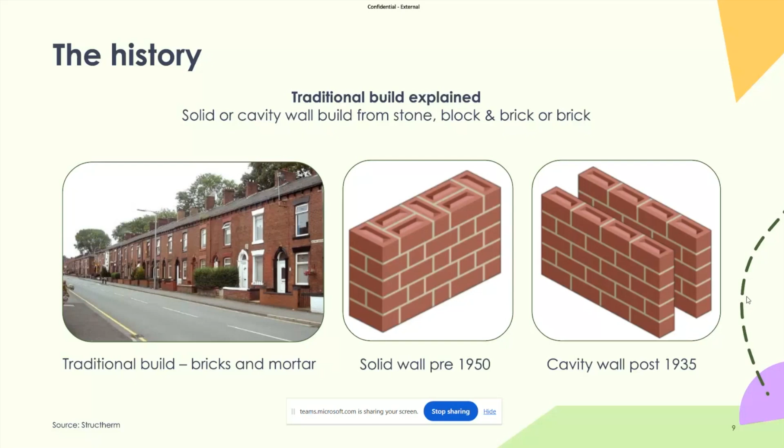In terms of solid walls, obviously pre-1950 is pretty much solid wall construction. Cavity walls started coming into construction around 1935, but as things have changed over the years, it's a multitude of different sorts of cavity walls that you'll find now. You'll find block and brick, some will be brick and brick, all sorts of multitudes. And the way things have moved on, a lot of more modern buildings will be a mixture of timber frame as well as a brick skin on the outside.

So the history with non-traditional buildings - obviously after World War II, there was a bit of a change in the construction sector. There was a shortage of brick manufacturers as well as actual skilled labour and brick layers to put the houses up. So as the war effort looked to diversify away from the factories that were supporting the war, a lot of them then got involved in building houses.

So stuff like the BISF, which was the British Iron and Steel Federation - they designed the BISF house, which was done in a few different archetypes. But generally, it was a need to construct buildings quickly, and they didn't always think of the long-term solution. So some of them only had a design life of 30 years.

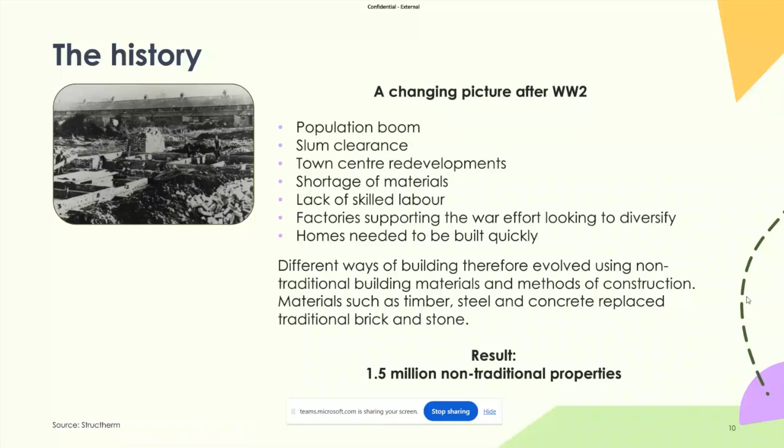A couple of examples of the different types of non-trads that you'll come across, particularly in terms of housing associations and council stock. A lot of these properties were built by councils and housing associations, so a lot of them remain within their housing stock. They are some of the harder properties to deal with, and the main issue is the structural condition.

BISF properties are one of the ones that fall into the steel frame category. You've got Boswells, Aireys again, they fall into the PRC category, so they're a concrete frame structure with concrete panels on the outside. The cross walls are a bit of a later addition, so they're classed as RATTRADs, or rational traditional construction.

RATTRADs are a little bit later than non-traditional construction. The idea was you would build traditional construction masonry walls as your gable end and party walls, and then have timber factory-made panel constructions shipped in, transported on site, and dropped in on the front and rears. In many cases they're non-load bearing on the front and rear - just infill panels.

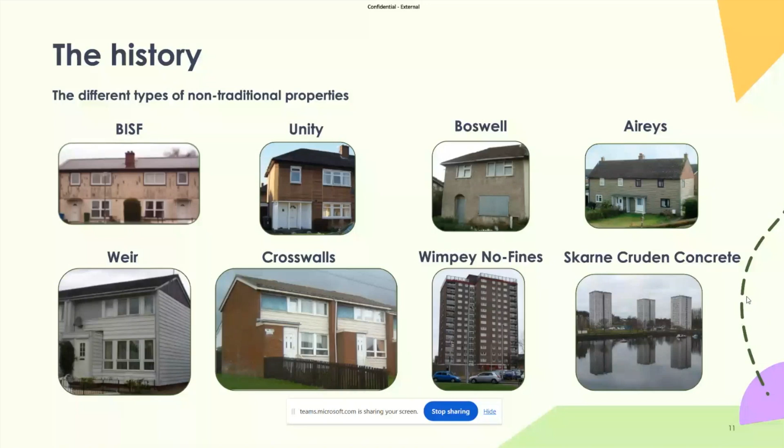The four types of non-trads by category are: timber frame, precast concrete, metal frame, and in situ concrete. For timber frame properties, there's over 142 of these specified by the BRE, and in terms of identifying timber frame properties, it can be a little bit more difficult.

The main reason for that is they're externally clad with a multitude of different finishes, and when they were originally constructed, you may find they've gone through refurbishment projects where the original cladding was taken off and replaced with something else. So trying to identify the type of timber frame non-trad you're dealing with can be quite difficult.

In terms of the solution for non-trads, the metal frames - for example the BISF, which the 3D graphic is showing - is the steel frame structure with sheeting rails and wrinkly tin cladding at first floor level. At ground floor, the structure differs again.

Instead of sheeting rails and wrinkly tin cladding, you've got render on chicken wire mesh that's pinned back to the steel frame. Some of these steel frames have brickwork on the outside - Trusteel is a good example. Trusteel construction is basically a steel frame with a brick skin on the outside, and dealing with them requires a different solution.

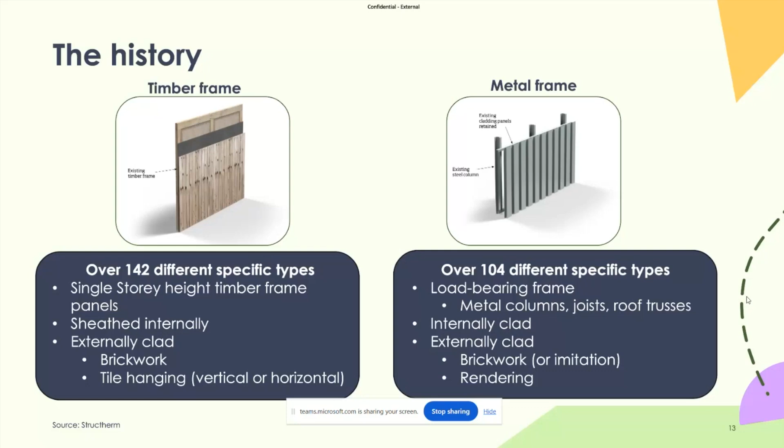External wall insulation works for solid wall properties, where the name suggests you've got a solid wall fixture. With a lot of these non-traditional properties, you'll find you've either got framed structures or, like in situ concrete, two leaves of in situ concrete typical of a cavity wall construction - with block work on your inner leaf and brickwork on the outer leaf.

With in situ concrete, your usual issue is that you'll find problems with the wall ties between the two layers of concrete. Another form of in situ concrete that's a non-traditional construction worth mentioning is no-fines construction.

No fines is a little bit better than some of the other non-traditional properties, in the sense that it tends to be around 200 to 250 mil thick of no-fines in situ concrete. The problem with no-fines is that, as the name suggests, there's no fines within the mix, so it's quite an aggregate concrete mixture.

When you put fixings in there, they tend to be pulled out by hand because they just blow in the actual concrete. We have a method of dealing with that - rather than specifying hammer fixings, you would look to specify STRU anchors. It's also very important that you do pull-out testing across the properties you'd be looking to address, because the nature of no-fines concrete means the mix of the pour is always a little bit random.

The people mixing and pouring concrete for the first couple of houses on a street during construction might use a different mix to what you find later down the street. There might have been a different group of labour working on those properties, or they might have simply got a better mix as they went through the construction phase.

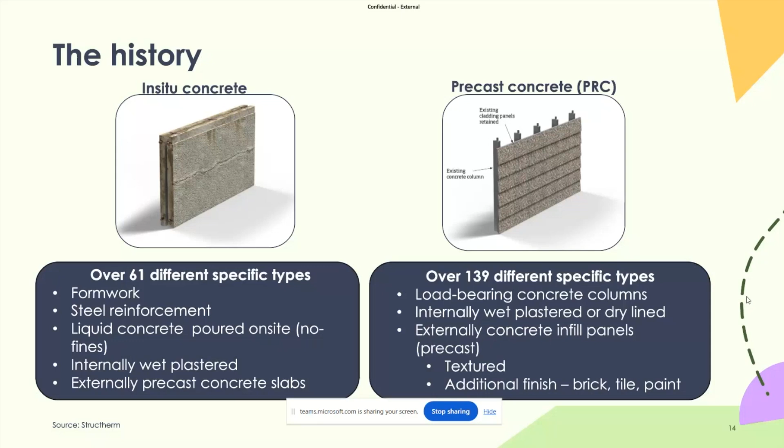So it's important for all these non-traditional properties to undertake proper structural investigations, with structural engineer involvement, ideally engineers who have experience dealing with these types of properties in the past. That's becoming more of a problem, as the age of the properties increases, the wisdom of the people dealing with these properties is also shrinking.

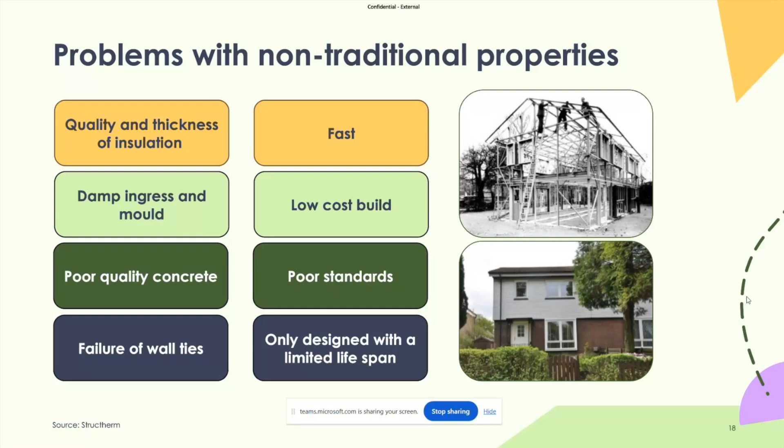Identifying non-trads - as I've mentioned with timber frame properties, the different cladding types can make it quite difficult, as well as the fact that when they were originally constructed, a lot of works might have been undertaken at that time. We've seen BISF properties that have been overclad with weatherboarding, but there's been no insulation - it was just an aesthetic upgrade.

It might also have been a way to stop water ingress if they were having problems with the existing cladding. So identifying the properties is really important for us as a starting point, as well as structural engineer involvement - if they're able to help identify properties that aren't able to be identified until you actually start poking around and making holes in these walls, and getting up into the roof space is always a good point.

Corrosion is an issue in terms of problems that can be faced, as we've mentioned with the steel frame properties, and what we've found with some of the issues of corrosion. It's a real thing that needs to be taken into account, particularly if you're going to be putting external wall insulation or even internal wall insulation on some of these structures. If they're not structurally sound, the last thing you want to be doing is applying additional weight.

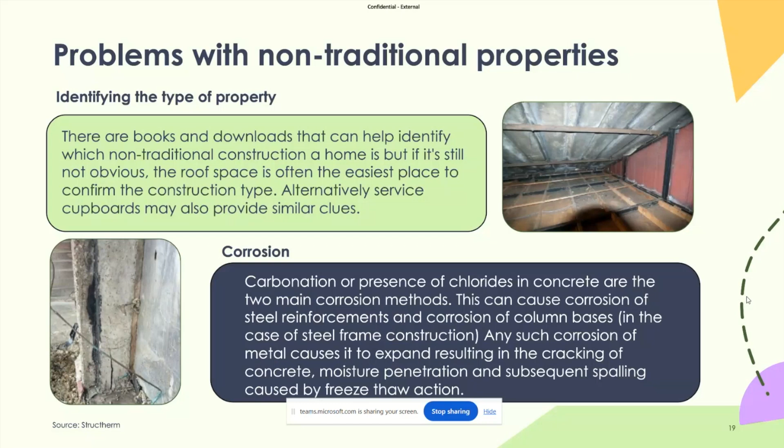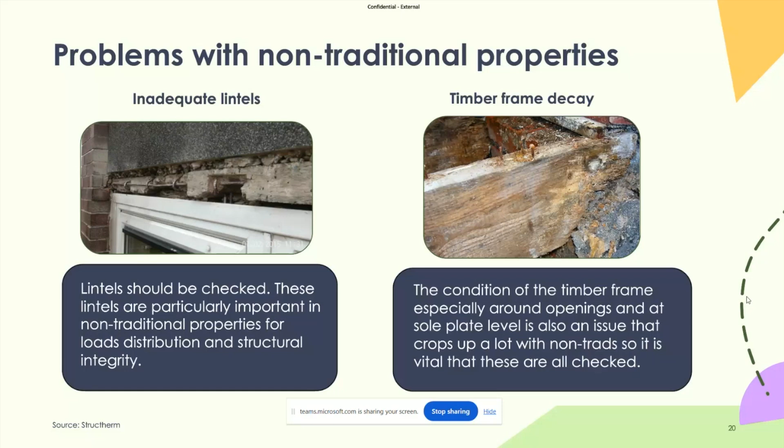As I've touched on, in terms of trying to identify non-trads, the problem with existing cladding is the wear and tear. They're aging properties - a lot of these were built in the 50s and 60s, so they're coming on to 60, 70 years old in a lot of cases.

The cladding that was always on the outside, the BISF steel sheet profile, has tended to fare quite well. We have seen it painted over the years, and it doesn't look very clever when that starts flaking, but they do the job in the sense that they keep the water out.

Concrete panels on precast tend to be the worst in terms of cladding panels for water ingress. Weatherboarding and timber boarding can have problems too, as can tile hanging - it comes with any of these cladding systems. If they've not been properly maintained, you're going to find issues with water ingress, and parts of the cladding wanting to part away from the building. We've found some precast concrete panels in such a bad structural state that the panels are basically bowing away from the walls, or stack bonded, so one has fallen onto another and is slipping out of place.

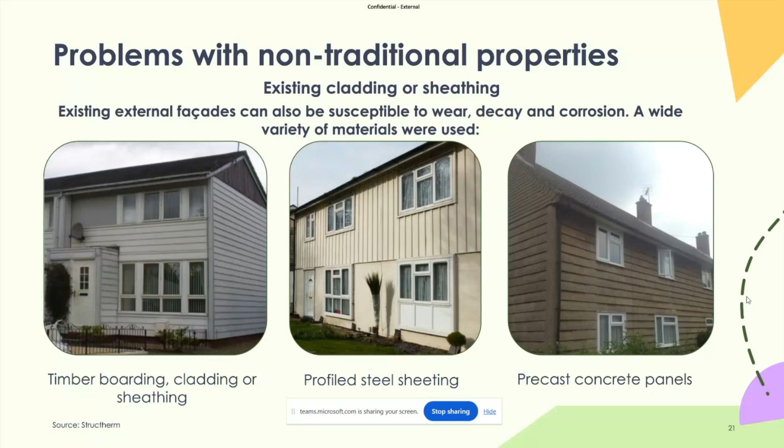So it's about identifying these properties and understanding what condition they're in before specifying solutions. As mentioned with the Airey property, that's probably the key one on this list, but this list is from the Housing Act 1985, which put the designated defective clauses together from the BRE - these are the non-traditional dwellings that the BRE identified as defective, meaning they've got structural issues.

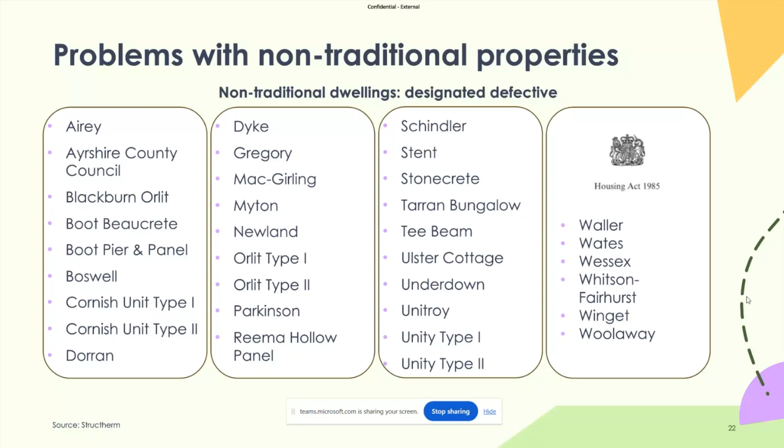So the challenge with non-traditional buildings is upgrading to current regs while minimising the risk of condensation. It goes without saying that if you're applying external wall insulation to any building, you want to minimise condensation risk and increase the thermal value. Increasing thermal value is straightforward for straightforward walls - if it's all solid brickwork with just window openings to consider, that's not too bad in terms of calculations and making sure your thermal bridging is okay.

When you're into non-trads, you're into a multitude of different wall build-ups. On the same property you might have different areas of different build-up - you might have wrinkly tin steel frame upstairs with some insulation within the frame, and downstairs solid construction with just render mesh, no insulation within the frame. So you need a starting point for deciding what to do with that existing build-up. Are you going to alter it before putting EWI on it? And if so, what's the risk of condensation or thermal bridging in areas where you're not able to get the same level of insulation?

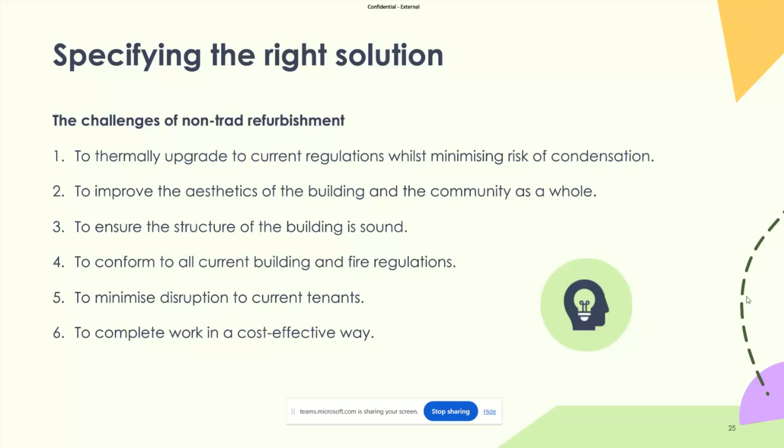So the options for insulating properties: you might be aware of IWI, internal wall insulation, and cavity wall insulation. Both offer their benefits and disadvantages. IWI's main disadvantage is the loss of living space and having to do the works inside the property. As mentioned with tenants, engagement is important, and the last thing people want is someone taking all the wallpaper off to put IWI in, then having to redecorate and disrupting kitchen and bathroom spaces.

But the upside to IWI is that it can lend itself in certain situations. If you've got rear extensions or conservatories and you're doing an EWI scheme, you might do EWI to the front, rear, and side elevations, but when it comes to the conservatory space you'd do IWI there instead, while still applying wall insulation externally to that wall. So there are details like that where you can get continuity of insulation when you've got conservatories on the rear of properties - it's just using a mixture of EWI and IWI sensibly.

Cavity wall insulation: as mentioned at the beginning, solid wall and cavity walls can both be treated with EWI. The benefit of using EWI with cavity wall insulation is it addresses some of the drawbacks of CWI. If you're living in rain exposure zones, which are quite high in Scotland, the northwest Manchester area, up on the Pennines where I am here, South Wales and the westerly Wales areas, it's a lot wetter than in the east and southeast, for example.

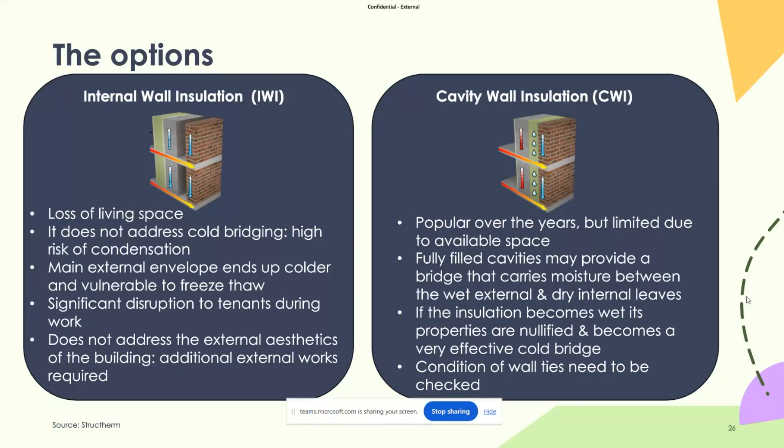The other side of that is when applying EWI to cavity wall structures that don't have insulation in them, it's important to block off the head of the cavity and any openings that could cause thermal bypass, or the risk of it occurring in the cavity - basically when cold air moves in the cavity behind the EWI system, which downgrades its effect.

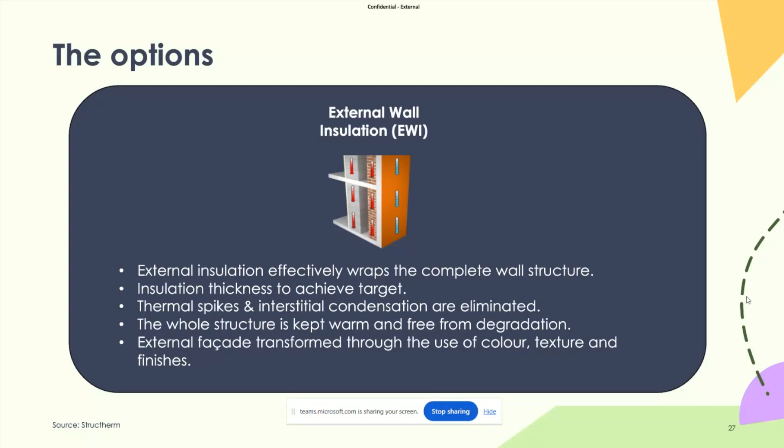So EWI, for anybody not familiar with external wall insulation, is effectively insulation layers with a render coat and base mesh. Basically you've got your insulation fixed back to your structure, then a render coat with a mesh layer which provides strength and impact resistance, and then a finish of choice. The render finishes tend to vary, and we'll touch on them a little later.

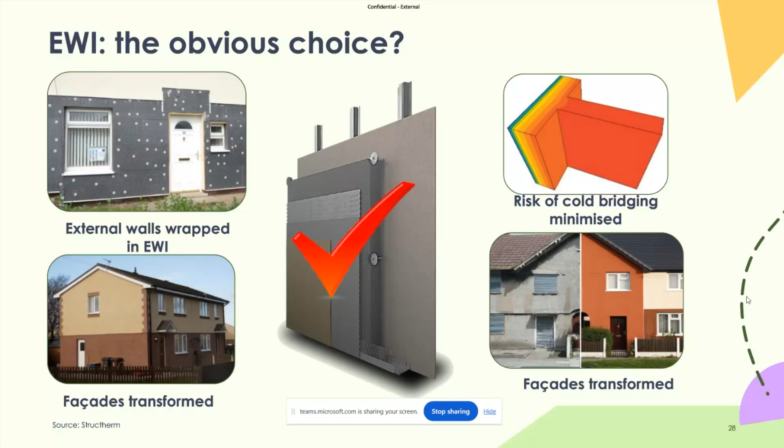So is EWI the obvious choice? As I've already touched on, I don't think so, in the sense that it's not always the go-to solution. In some cases, there's a mixture and an approach that works best depending on what the scheme is. So if you've got the luxury of being able to do a mixture of CWI and EWI and getting increased thermal value, it also means the EWI system can be slightly thinner than if you had no insulation within the cavity. So it's being able to make these choices and understand what's required for each project.

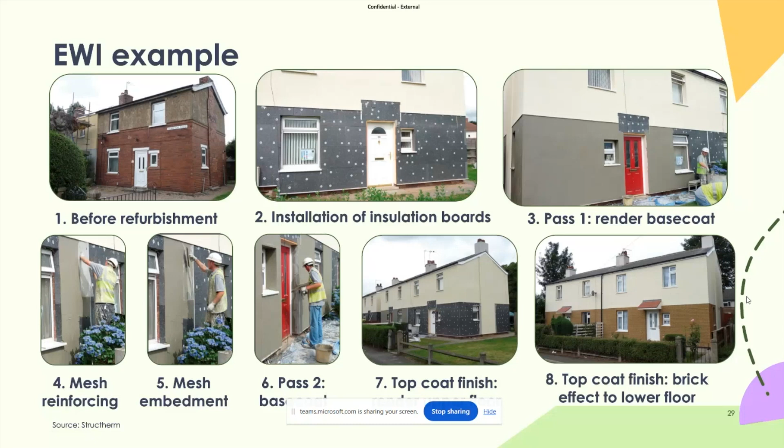So this is an example of an EWI installation process: getting the insulation boards, base coat, the mesh embedment, the base coat layer for the second layer, and then your top coat finishes. So then we're finished in the silicon and brick finish on these particular properties.

As I've already touched on with IWI and EWI, there can be instances with EWI where there needs to be additional works done to make it suitable, otherwise you're going to have issues. So as I've mentioned with the structural engineer, making sure that one is appointed and understands the structure and the loads of the building, so you don't want to be putting on additional weight if that external leaf is going to want to part away from the primary frame of the structure.

Likewise, ensuring that the actual substrate can be fixed. So solid wall properties, as I've mentioned with EWI, can become mechanically fixed as well as adhesively fixed if required. That's perfectly easy to do in the sense that you can do a fixing pull test into the brickwork, and the brickwork tends to be fairly consistent across the wall.

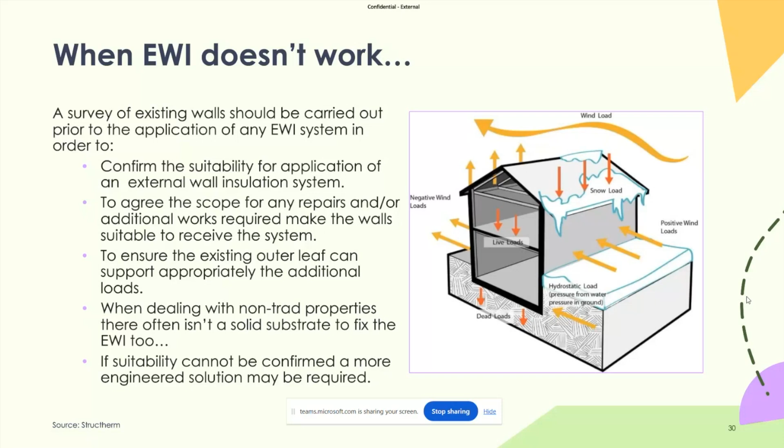When you're with non-traditional properties, you don't have a solid wall to fix to, and instead you've got a framed structure with an infill of some sort, and that infill in some instances might only be 50mm concrete panels, which are not going to provide you a wind load, a pull load, in the sense that the fixing test will just go through the concrete panel, spoil the back of the panel, and you'll be able to pull the fixing out with your hand.

So the structural EWI system differs to standard EWI in the sense that it's formed within a wire frame cage. The Warren trusses give the cage its structural rigidity and strength. The structural EWI system is used for non-traditional properties as well as high-rise properties where standard EWI isn't a viable solution. It's able to span, and it fixes differently to how a standard EWI system fixes. We've also used it for reconfiguring building facades, enclosing balconies and walkways on high-rise buildings, and forming new and extending parapets when you get to the very top lift of the high-rise.

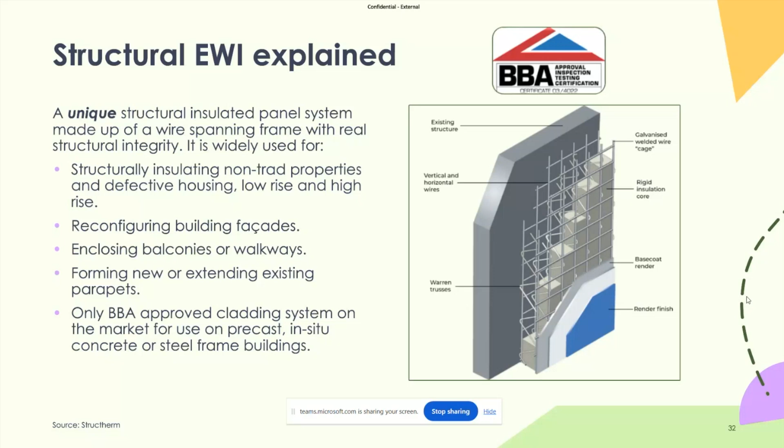As the EWI and structural EWI differ, the main thing with the existing substrate is how that is going to work. So if you think of EWI as a tea cozy, in the sense that it's wrapped around the building and keeps it warm, the structural EWI can be seen as a bit more of an EWI system that's got a tea cozy with a corset on, in the sense that it's holding the building tight and basically stiffening the structure up.

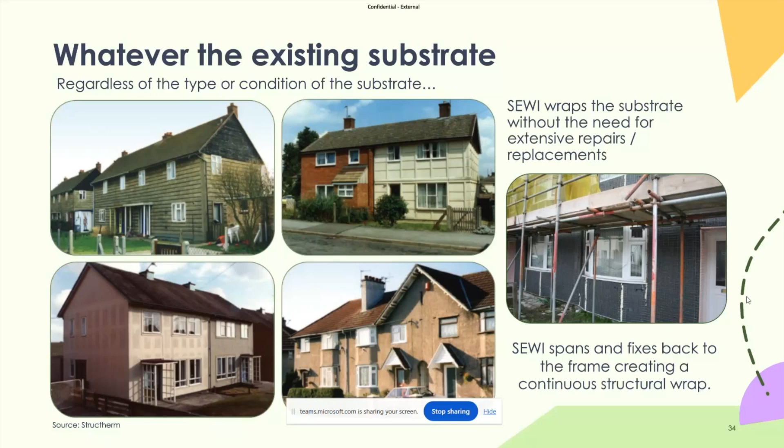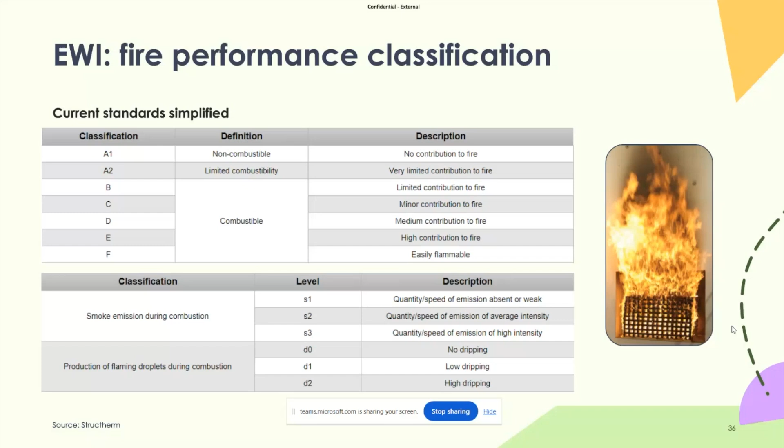So this summary is the insulation summary. As an actual insulation product, mineral fibre, mineral wool, rock wool, also known as stone wool, is an A1 insulation. That's for high-rise buildings as well as any low-rise buildings that require an A1 or an A2 system. With phenolic, that's B-rated in terms of an actual incident starting, and then your graphite is an E.

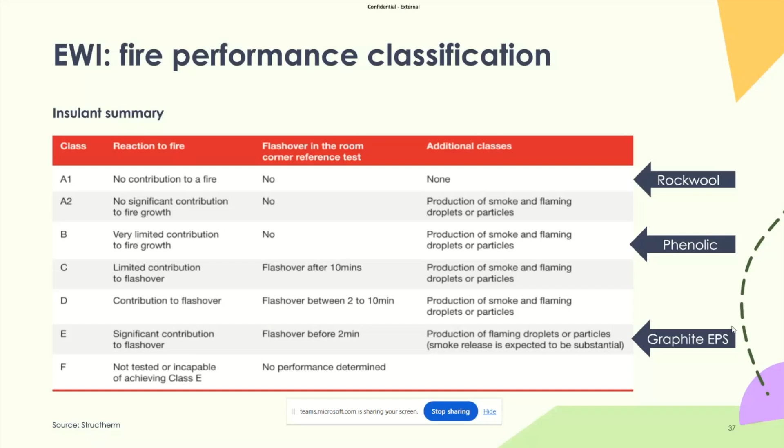And then with the mineral fibre, you can achieve either an A1 or an A2 rated system, and that will depend on what finish is utilised.

So A2 rated mineral fibre EWI systems are silicon render finishes, brick effect render finishes, some dash render finishes. In terms of A1, it's capable of getting an A1 rated mineral fibre system with what is known as mineral render.

Mineral render is different to silicon render in the sense that it needs an additional paint layer. So that's the only downside of going to A1 with the mineral render finish, is that it requires an additional painting coat. The other thing that needs to be considered is long-term maintenance. You don't want to be painting it in 10 years with a paint that falls outside of the fire certificate, because then it would invalidate that fire certification for that product.

So it's very important when specifying and putting forward a system for buildings, particularly high-rise buildings, that you understand what EWI system is required in terms of regulations, as well as the long-term maintenance for that EWI system. So it might not always be best to specify A1 because it's got the best rating, because there are long-term maintenance issues that need to be accounted for, and therefore A2 might be a better solution. But again, taking it on a case-by-case basis is what's required.

In terms of installation, the structural EWI is similar to EWI in how it's fixed, but there's a few slight differences. So the base trim is fitted at DPC level, as it would be with a standard EWI system.

The panels are then cut and located. Structherm provide a system panel layout drawing for most projects we're involved in, so a structural EWI project would require a panel layout drawing, and that's basically the best way to orientate the panels, whether stacking them vertically or standing them horizontally. Because they're 2.4 by 1.2 meters, they're able to span in different ways depending on what the existing structure is.

So because of all these non-traditional structures having different centers of the columns or having a different actual wall build-up, it's been able to adapt the structural EWI location of the fixings. So the way the fixings are fixed back on the structural panel is different to EWI again.

So EWI fixings are fixed through the insulation. You put the EWI insulation board against the wall, and then the fixing goes through the insulation and into the structure. The structural EWI differs in the sense that the insulation is held within the space frame wire cage.

That's the part of the system that's giving it its spanning capability, and that's where the insulation is removed. It's basically cut out in a square with a pad saw. The fixing is then fixed at the rear of the cage, and that goes straight back into the structure.

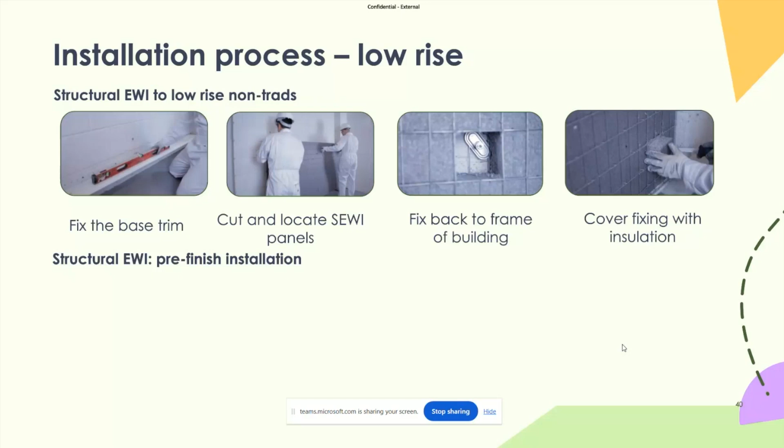So that reduces the cantilever effect on the fixing, and it allows the insulation to be then put back over the fixing head. So you don't get the point loss through the fixing that you'd usually get for the thermal transmission through the insulation. Next, it's all meshed together, and then it's base coated and rendered up, ready for the finishing coats.

In terms of high rise, as mentioned, the structural EWI panel can differ in how it's applied. So the structural EWI panel for high rise buildings is fixed differently. What we would do is fix a channel at every floor slab.

The reason for that is on high rise buildings, when you can't fix a standard EWI system, it's generally down to the infill panels not being well fixed back to the frame. So with concrete frame high rise buildings, you've got concrete floor slabs, which are nice and solid, but then in between there, you've got a multitude of different infills.

So there might be a concrete panel that's fixed back to the floor slab and fixed at the head and base of the slab. Others might be no-fines concrete that's been infill poured between the slabs, and therefore when doing the fixing testing, it might not provide adequate loads for standard EWI. So the structural EWI allows you to avoid having to fix into that infill on the high rise, spanning and basically just fixing at the channel at floor slab level, then spanning and avoiding that infill.

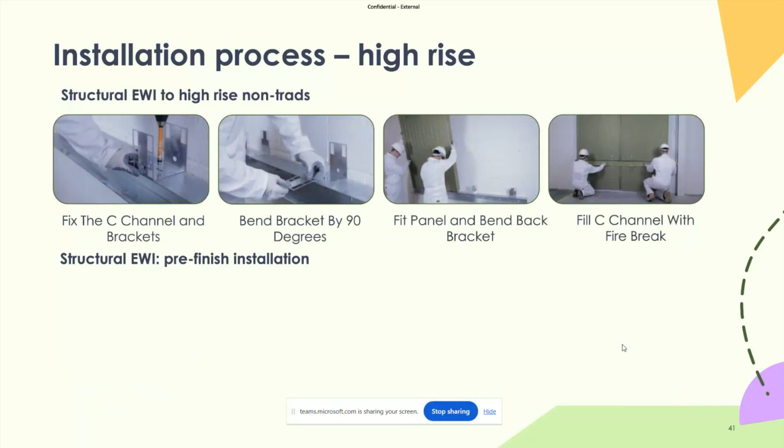Your fire breaks are then fitted all the way through on your C channel at floor slab level, and then similar to the standard low rise application, it's all panelled, meshed together, and then rendered up and finished.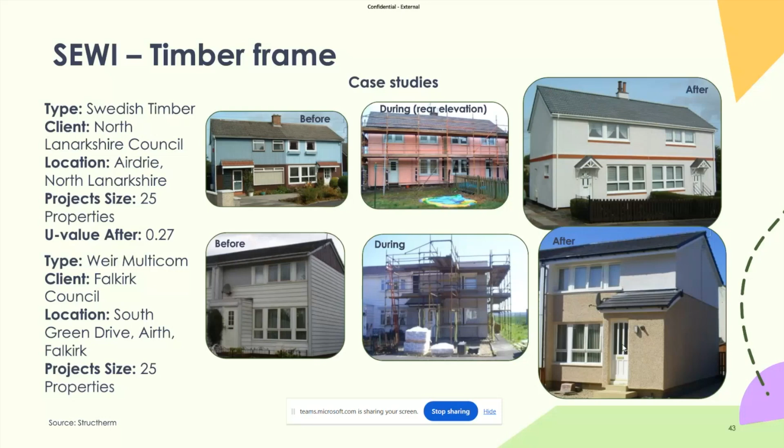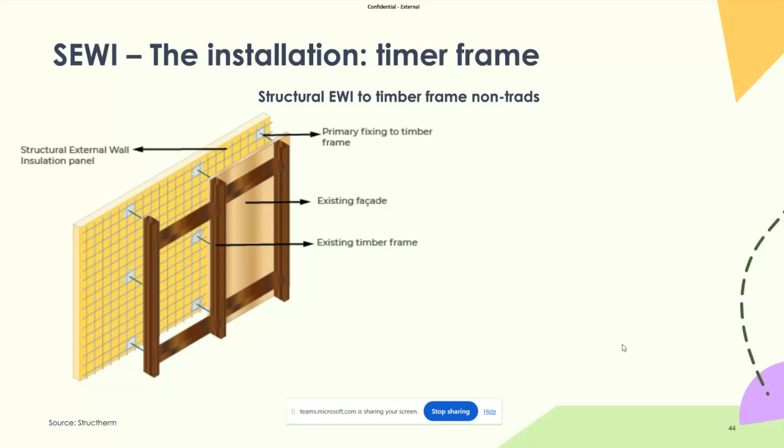That graphic shows how the structural EWI fixes back to the primary frame of the structure. The advantage is that you're putting the loads back to the primary frame rather than onto the external cladding. If you were fixing EWI to the external cladding panels, you would risk those panels parting away from the primary frame. That shows how it's worked on a timber frame structure as well.

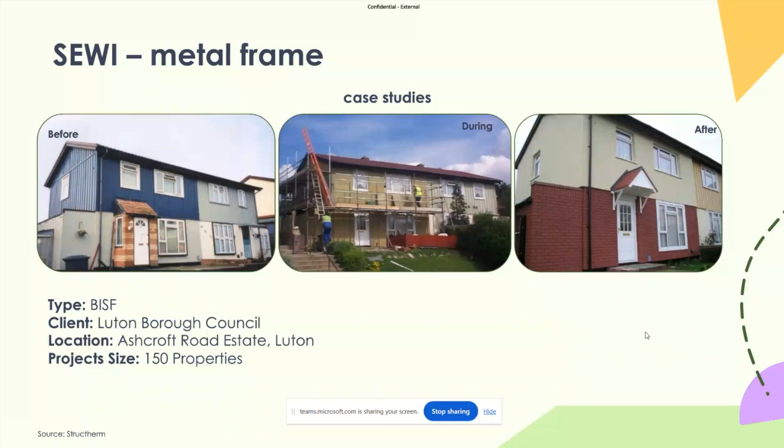So with steel frame, BISF is a good example. That's the steel frame upstairs with the wrinkly tin, and the chicken wire rendered mesh downstairs. That's an example there of an external wall insulation system being used for the BISF property.

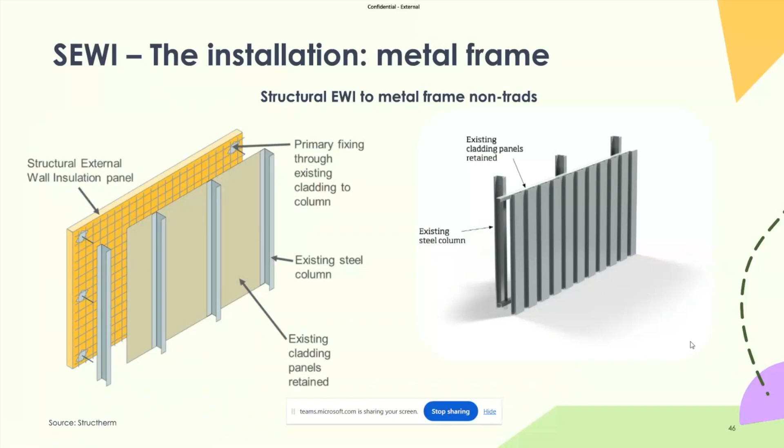Again, with metal frame, it's the structural EWI being used to fix back to the primary frame of the structure, so you're using the structural panel to span over the existing steels and fix back through. You've got the option of either retaining or removing the existing cladding panels. Depending on what measures you're doing, you might want to infill that frame prior to putting the structural panel on the outside. You might find the wrinkly tin has degraded in areas, rusted away, or failed in terms of parting away from the sheeting rails, so getting rid of it prior to putting the structural cage on can be part of the project scope. But you've got the option with the structural cage to adapt it to what needs to be done for that particular project.

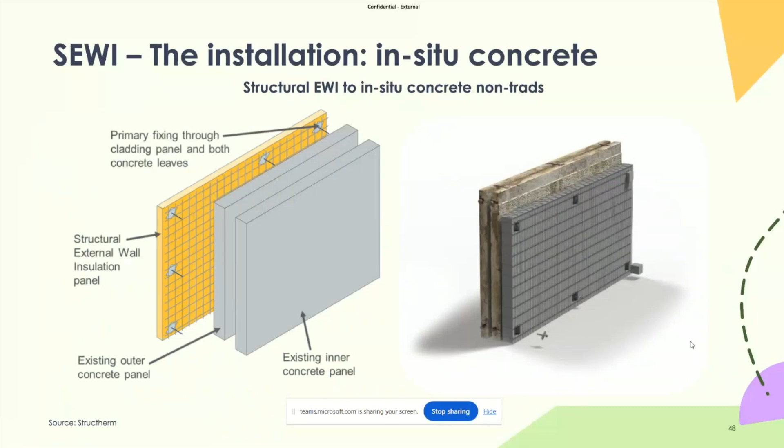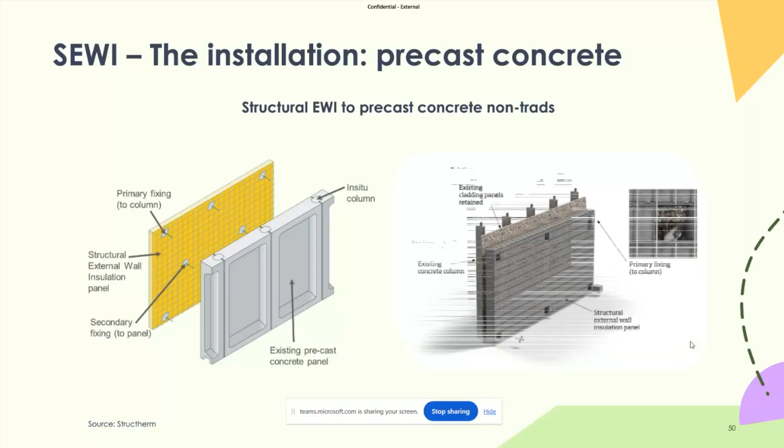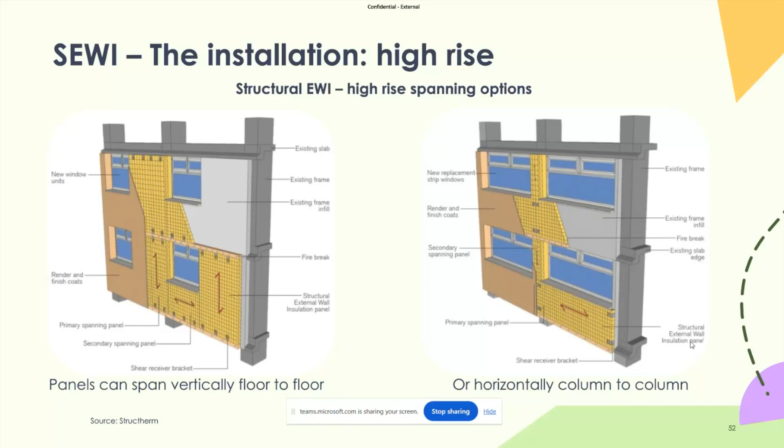On the far end gables, they were brick cavity construction. They needed some additional wall ties, but other than that they were pretty good, and therefore standard EWI was able to be utilised.

On the front and rear elevations, they were Siporex blockwork in between the floor slabs. The structural engineer on that project looked at the Siporex, did some fixing testing, and concluded it wasn't adequate to fix to, so the structural EWI system was required to span over the floor slabs.

Avoiding fixing into that infill panel, the system had previously had a rain screen cladding system on, which also avoided fixing into the infill, instead spanning from floor to floor with a cladding panel on the outside. So using structural EWI allows you to address issues that standard EWI won't be able to get over.

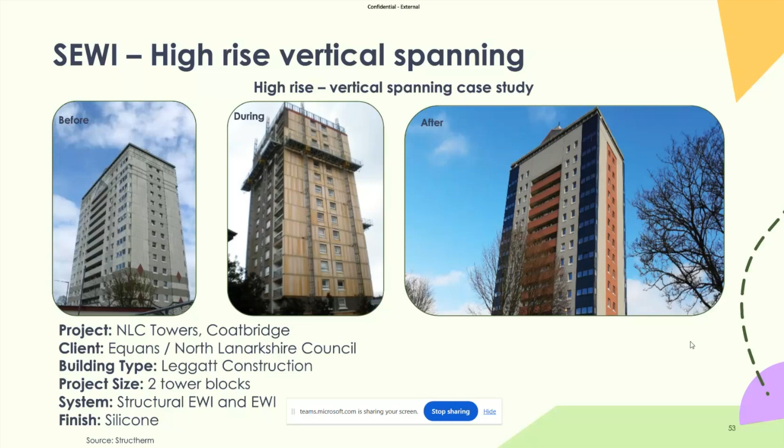In terms of finishes and colours, silicone render is something everyone's quite familiar with now. The look for the past 10 years seems to have been white render with grey windows, and it seems to be ever popular.

Dash render finishes don't tend to be specified as often. These are a mixture of a render finish with an aggregate thrown into the render. The upside is that they're a bit more hard wearing and can take more of a beating than silicone renders.

If you're in a high traffic area where the silicone render is going to be getting brushed down by bins daily, or something causing risk of damage, the dash might be a better solution, providing a longer lasting, more robust finish.

We joke in the office, particularly with our Scottish counterparts, that they cover everything in batter, including the houses. Dash finishes are used a lot in Scotland, particularly because of the weather, looking for a more hard-wearing, robust finish is the way forward.

In terms of brick effect renders and brick slips, these are other finishes offered in the market. Brick effect render, if you're not familiar, is monotone in the sense you've got two colours - a mortar colour and a face colour - scribed out to provide a brick finish.

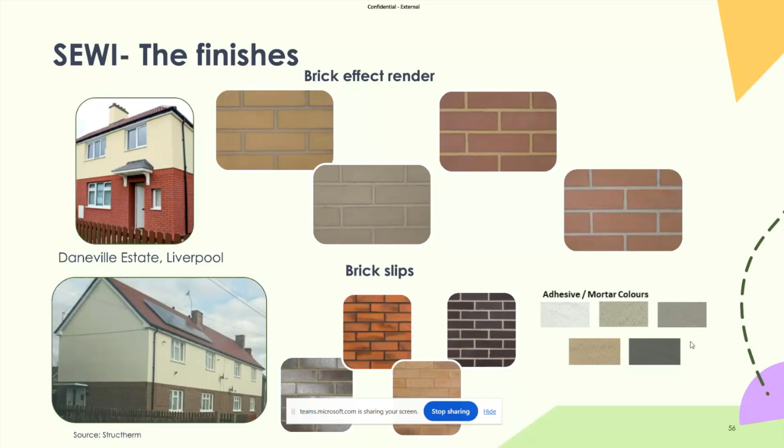In terms of ArtBrick, that's a finish bespoke to ourselves, which has been on the market for a number of years now, and addresses some of the problems you'd find with standard brick effect render or brick slip finishes.

Standard brick effect renders are monotone in colour - a brick colour and a mortar colour - but ArtBrick allows you to use a series of tints that provide different multi-stock effects, achieving the same look as a brick slip without the expense or impracticalities of installing brick slips.

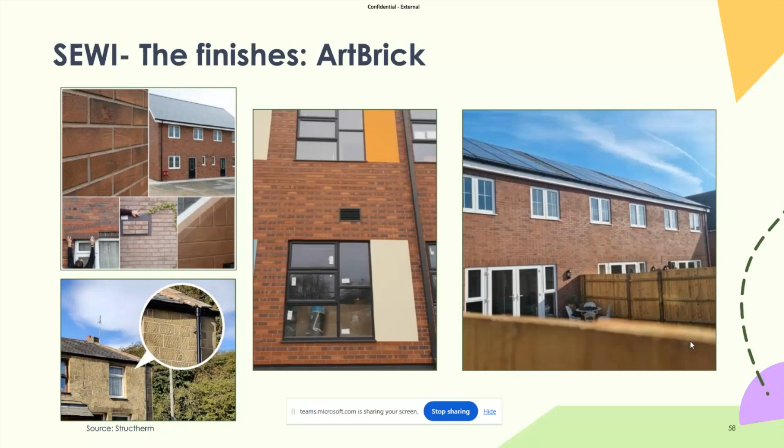A couple of examples here show more projects that have used the ArtBrick finish. It's also being used for stone effect, as well as replicating features, as shown on the L&Q project. A couple of examples show the ArtBrick finish in stone effect.

The bottom left one there is the Orbit Housing Association. We've been assisting Orbit from the SHDF demonstrator phase all the way through to their current wave 3 phase that they've got their bid in for. In terms of getting a solution for EWI where you might have a conservation or planning issue, it's always good to be able to offer a like-for-like solution using the finish.

That's it really in terms of the actual presentation slides. I think that one was slightly out of order on the last one, but that's it. Just thank you for your time, and if you've got any questions I'd be happy to help.